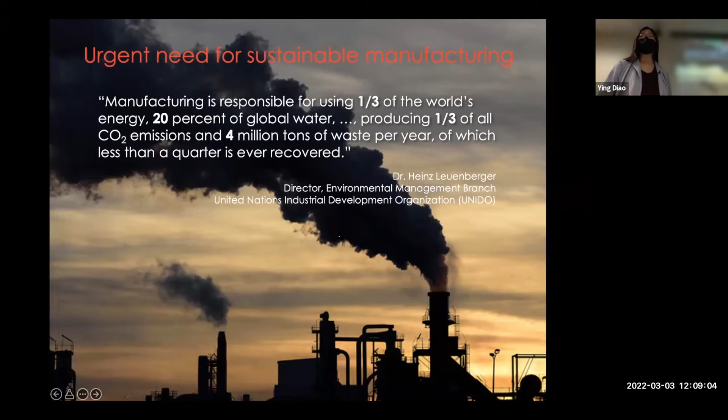So one day he was deep in thought, reading a book, and then he accidentally dipped his pen into molten tin on his desk. And then when he drew out his pen, he saw a single crystalline tin at the tip of the pen. At the time, he didn't anticipate this was critical to semiconductor manufacturing, but 50 years later, it was picked up to manufacture semiconductors. Basically, you use a seed rod to dip into molten silicon and then pull out a high purity single crystalline ingot.

Despite the ingenuity of the process, it actually requires a lot of energy. As you can see, you have to melt silicon. After you get these giant ingots, you slice it down in a subtractive process and then package it into a solar cell or tiny circuits.

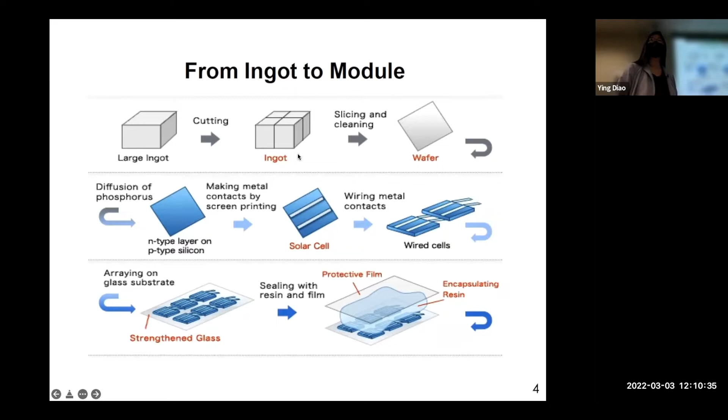These subtractive manufacturing processes are inherently energy intensive, because you have to cut things to break chemical bonds. Because of how energy intensive manufacturing is, we have to use the solar cells for 2 to 3 years to compensate for the manufacturing cost, the energy cost during manufacturing. So the energy payback time is 2 to 3 years for our silicon panels on the roof.

Also, for each ton of silicon, 4 tons of organic waste are produced. So it's hugely environmentally costly.

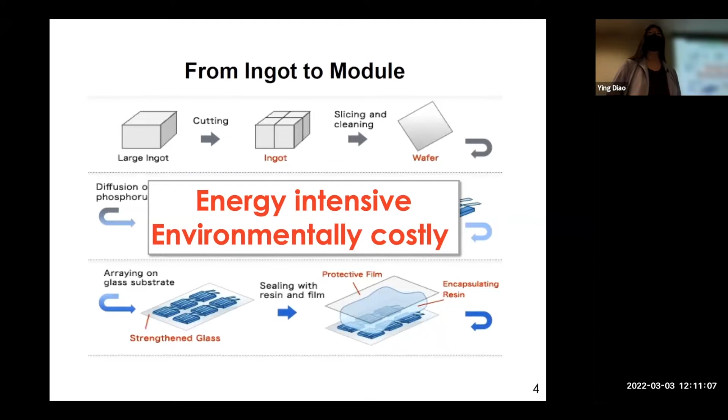However, if we can make solar cells the way we make newspapers, basically at ambient conditions using printing, then we can potentially drastically reduce the energy consumption. This is a video showing roll-to-roll printing of organic solar cells developed by a Danish startup, Infinity PV.

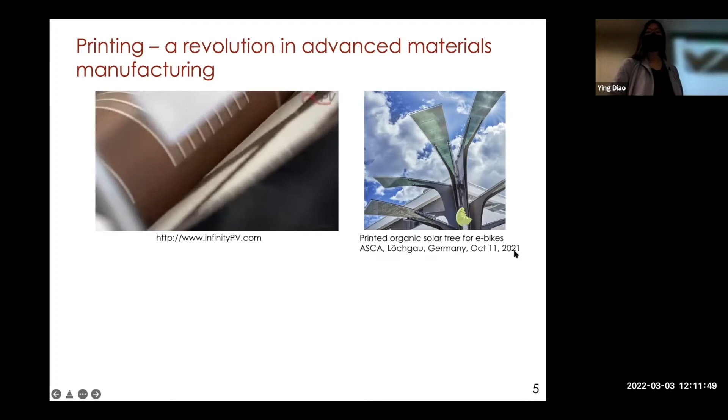In fact, there is a big push of organic PV commercialization in Europe. Here is a picture of a printed organic solar tree for electronic bikes in Germany that was recently installed.

In terms of energy consumption, if we print organic solar cells, the energy payback time can be as short as 1 day. That's a drastic reduction from 2 to 3 years for traditional silicon PV. And further, the manufacturing is high throughput.

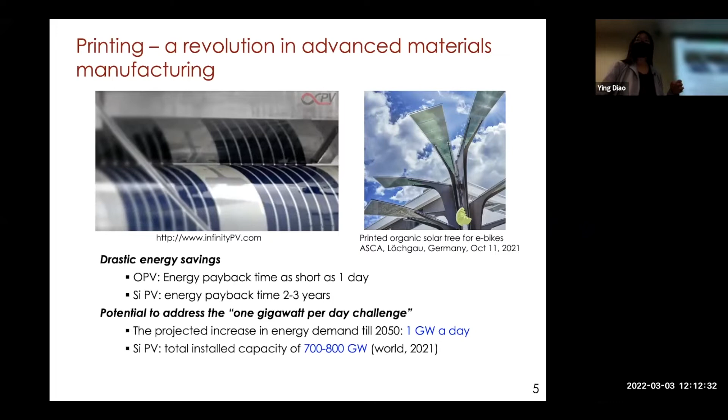Because of that, we can potentially address the 1 gigawatt per day challenge, since there's a growing energy demand by 1 gigawatt per day. That's a huge jump in energy demand every day. But if you look at silicon PV installed so far, it's only hundreds of gigawatts, because the production rate is just too slow for silicon PV to catch up to the energy demand increase.

But for organic solar cells, because we can print them the way we make newspapers, we can potentially address this rapid energy demand increase due to the throughput of production. That's just one example of how we can revolutionize advanced material manufacturing using printing. There are many other examples, such as printing batteries or thermoelectrics, etc.

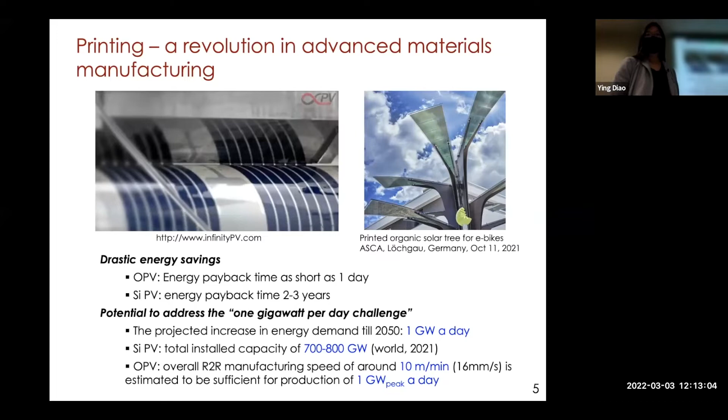Talking about printing technologies, we have come a really long way. As we learn in history books, printing was developed back in the Tang Dynasty using essentially a transfer printing method, by developing a mold and stamping it on the surface. Fast forward to the 21st century, a lot of innovations have happened to rejuvenate printing technologies.

The first one being digital revolution, embodied by 3D printing. One of the major advances of 3D printing is the seamless integration between software and hardware. This is the first patent that documented the integration between hardware and software for 3D printing.

That was almost as old as myself. So basically, CAD represents computer-aided design. You can conceptualize any objects you want to print, and then that is converted to G-code to direct the X, Y, Z motorized stage to print an actual object.

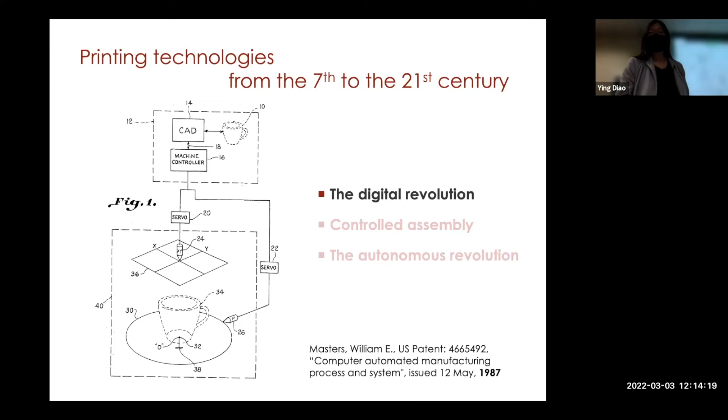Because of the digital revolution, 3D printers are now in the hands of everyday citizens. Another opportunity or challenge is to control assembly during printing.

When we print newspapers, we really don't care about how the ink particles assemble. But when we print functional materials, for example electronics or photonics, it's essential to be able to exactly place atoms where they need to be, or molecules with the right conformation and positioning.

This has been identified as one of the major challenges of transforming manufacturing by the Department of Energy only 2 years ago. So it still remains a challenge, but also an opportunity for us to innovate in this space.

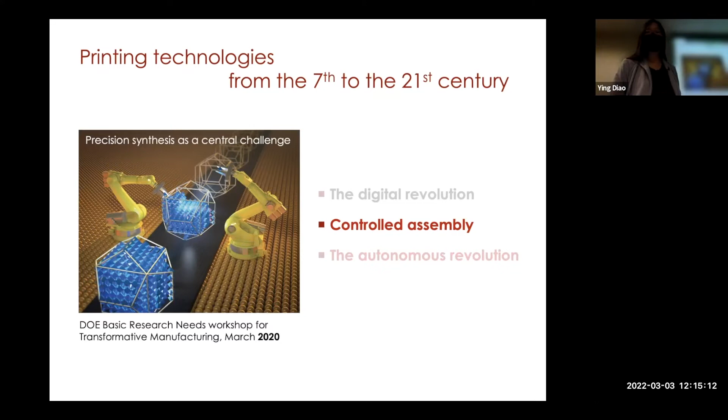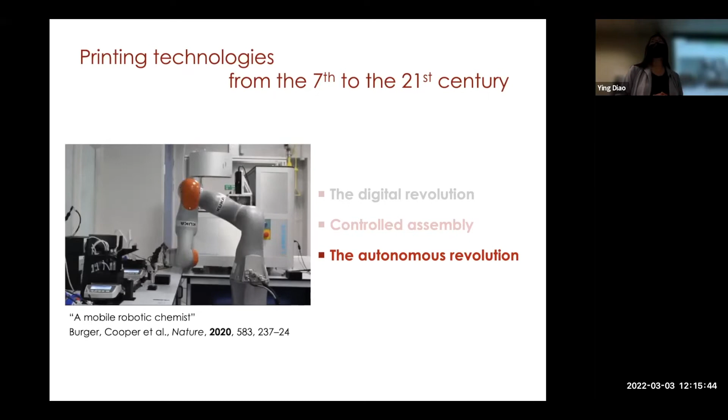So while using robots in manufacturing is nothing new, it's been there for several decades, the important distinction here is that these robots can think and make decisions by themselves. Based on the data they collected, they can think about what's the next step to take, enabled by artificial intelligence and machine learning.

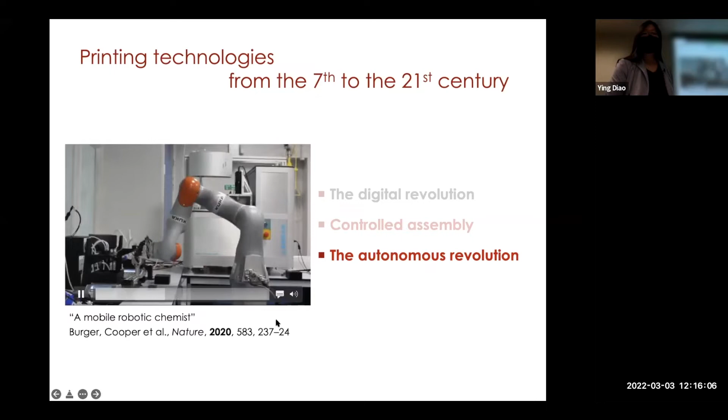So, this example is not relevant to printing, but actually the autonomous revolution is coming to the additive manufacturing domain just in the last few years.

So we'll adopt a two-pronged approach. One is that we hypothesize that assembly is essential to control structure and properties. So we'll use a physics-based approach, gaining fundamental insight of the assembly process so that we can enhance the properties of the materials we print.

An alternative approach is to say, well, let's not spend too much time figuring out how things work, but rather let's just go into a lab and do many, many experiments over and over again. With the data collected, we see if there is a trend between parameters and properties, and then decide what to do next. So that's basically an Edisonian trial and error approach, but accelerated by automation and machine learning. We think the two approaches are complementary, and they can mutually enhance each other.

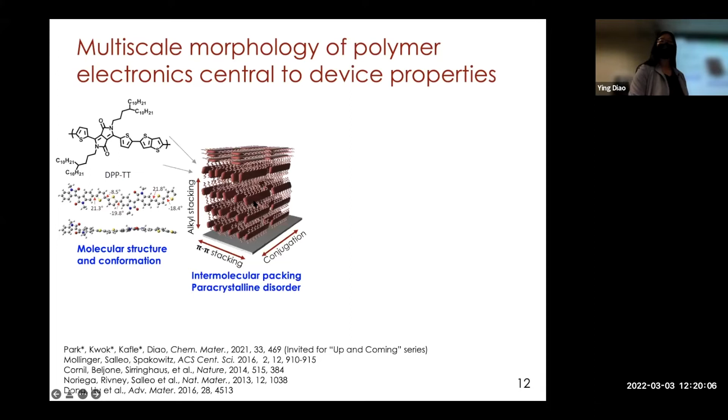These polymers can stack together, driven by strong pi-pi interactions, and that enables another transport mode from chain to chain, in addition to zipping a charge along the polymer chain. Surrounding these crystalline domains are amorphous domains, so we have to shuttle carriers between crystalline domains using tie chains. The community has figured out that alignment of the chains is very important to expedite charge transport.

So you can see that, well, this is an example of a simple transistor device that underpins a lot of electronics. You can see that there is a complex multiscale morphology we have to control during printing, and that can drastically tune electronic properties by orders of magnitude, even with small changes, such as twist.

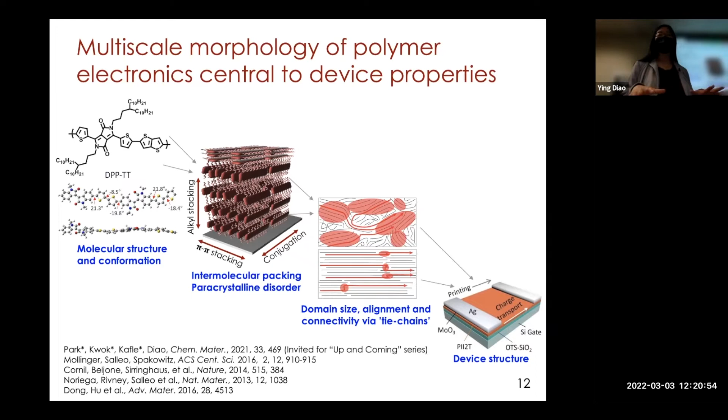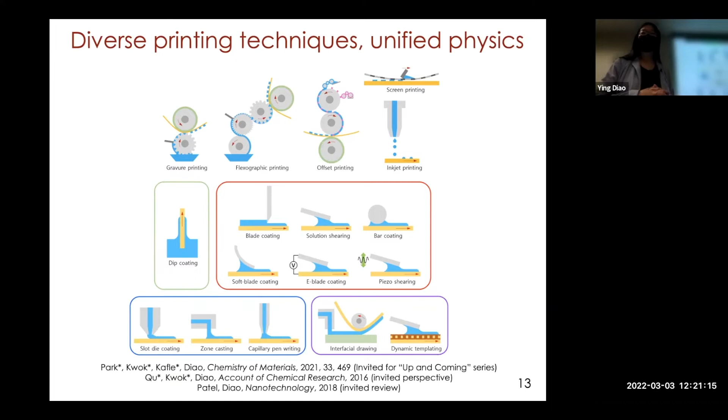One of the advantages of polymer electronics compared to silicon is that they are printable, and there is a wide range of printing technologies applied to printing electronics. They vary depending on how we apply the ink to a substrate. Although the list looks dazzling, there are just too many.

But if you lift the curtain to look at the physics, there are only two types of physics at play. One is a drying droplet problem that resembles how you spill coffee on the table and see how the coffee droplet dries. This underpins, for example, inkjet printing.

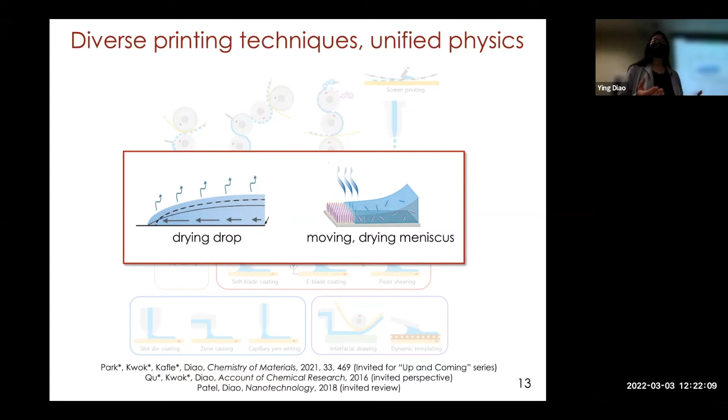Another type of problem is the moving drying meniscus. Basically, if the substrate or the ink applicator is being moved, then we drag out the meniscus that'll define the evaporation and assembly process. This underpins most meniscus printing techniques - to put it simply, it resembles how we apply butter on bread using a blade.

To get a little technical, it's fascinating to look at the transport processes during solution printing. For the drying droplet problem, the physics was figured out through the coffee ring phenomenon back in 1997. If you're familiar with coffee ring, basically if you drop coffee on the table, you'll see a ring that forms after the droplet dries.

That's because there's an uneven evaporation profile modulated by curvature of the ink-air interface. The evaporation rate radically increases when you get to the triple phase contact line. Because of this evaporation profile, it pulls the ink from the center to the edge through a flow called capillary flow, and that drives the particles to deposit on the edge. During inkjet printing, the physics is essentially the same.

Another type of transport process is governed by Marangoni flow. Due to the evaporation profile being uneven, there is a temperature/concentration gradient at the ink-air interface, which can drive an interfacial tension-driven flow. That's Marangoni flow.

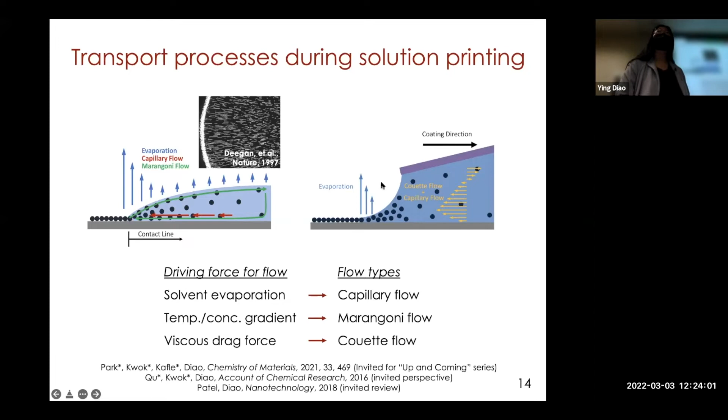If we start moving the substrate or the ink applicator, we introduce another flow type, driven by the substrate moving - basically the ink wants to stay with the substrate. That's called viscous drag force, and the flow resembles flow between parallel plates, which we call Couette flow. So you can see that the transport processes are really complex in these seemingly simple printing processes.

These processes define a very complex environment for the polymer molecules to assemble. Our question is: how do we know how the polymers assemble in this complex environment? If we know it, we can potentially control the assembly process using printing down to the molecular scale. So we hypothesized that during printing, the assembly pathway is drastically different from what is known.

This is a pathway figured out a few years ago. If you were to put a polymer in a vial and cool it down to assemble, we know that the polymers will first planarize at lower temperature, and then they will aggregate, and different parts of the polymer may crystallize separately - for example, the backbone and side chain can crystallize in separate steps. That'll form nanofibers, and the nanofibers can assemble in a colloidal fashion.

But then we're saying this pathway can be radically modified when we look at printing.

In the spirit of the Beckman Institute, I'd like to highlight that this is a team effort - team science - where we worked with David Beljonne from University of Mons in Belgium, who did DFT calculations to help us look at the electronic structure of polymers. Diwakar Shukla's group did molecular dynamics to help us understand the structure of the polymers in solution. Qian Chen's group in material science here did electron microscopy to review nanoscale structures of these polymers. The work was mainly done by Dr. Kyung-Sin Park and Justin Kwok of my group.

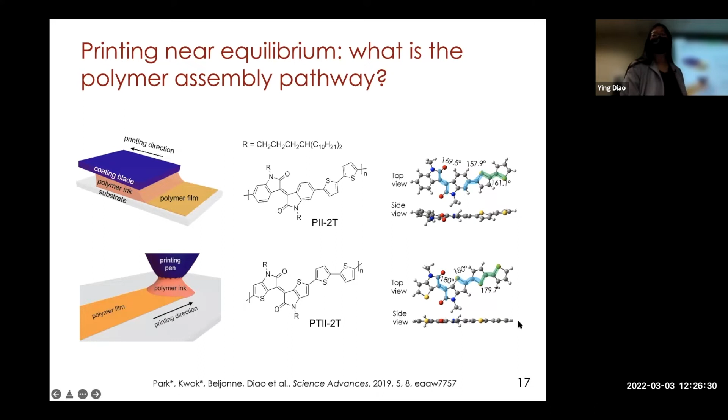One is a copolymer that is slightly twisted, if you look at the DFT calculations side view. The other is more planar - when we replace the benzene ring with a thiophene ring, we reduce the steric hindrance between oxygen and sulfur, and therefore planarize the polymer. The difference is very subtle, but nonetheless we found two radically different pathways between the two polymers.

So for the twisted polymer, we saw that if we print slowly, before the ink dries into a polymer thin film, we observe a blue phase, which is a chiral crystal mesophase. That is very surprising to us because the polymer itself is achiral.

Whereas when we print the planar polymer, we bypass the mesophase altogether. We observe this phenomenon again using another pair of polymers based on diketopyrrolopyrrole. Again, the twisted polymer goes through a chiral crystal phase, whereas the planar polymer bypasses the crystal phases. You can see that the texture of the films are really different, as well as the properties in the end.

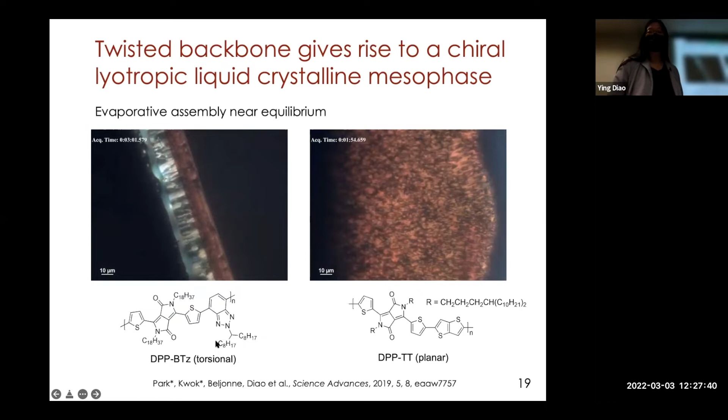So what's intriguing is how achiral polymers can give rise to chiral structures. So we determined that actually what underpins chirality is the helical structure.

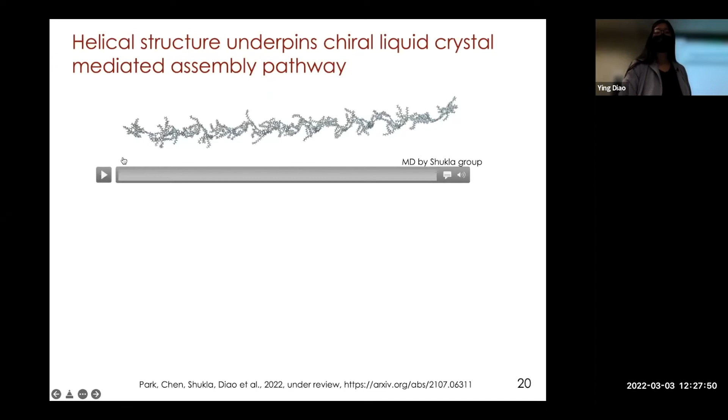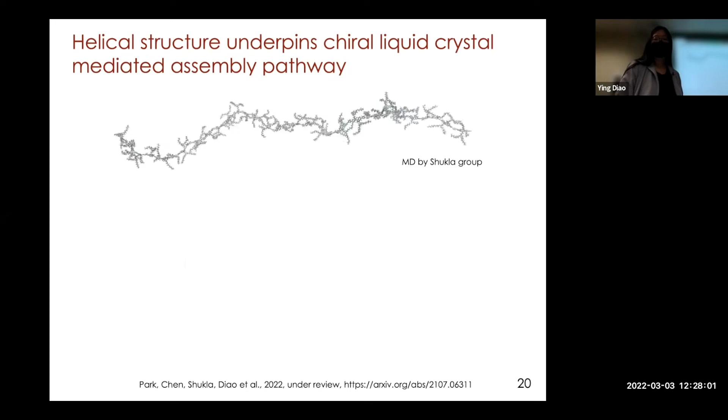We show that because the backbone of the polymer is slightly twisted, it can assemble in the solution phase as a helix, as shown by MD calculations. We show that basically how the helix forms is because the dihedral angles are correlated. If you look at the dihedral between the two thiophene rings, if it twists in one way, the next thiophene dihedral will also twist the same way. So they want to twist in the same way, and that's why they can form a helix over long range.

Another essential aspect is that these wavy polymers can stack in a staggered fashion to aggregate into helical fibers. That's shown by DFT calculations, that the pi-pi stacking happens in a staggered fashion. The indigo ring and the thiophene ring stack at 45-degree angles, which is a global minima. That's very different from how we traditionally think about stacking between these polymers. Usually we think they're cofacial, but actually they're staggered, and that enables such helical assembly to happen.

Having imagined this structure and validated it by electron microscopy, it really changed how we think about the structure of these polymers, because usually people think of them as layered structures driven by pi-pi stacking, but they can assemble into a helix. As we'll show, this can radically change the electronic properties.

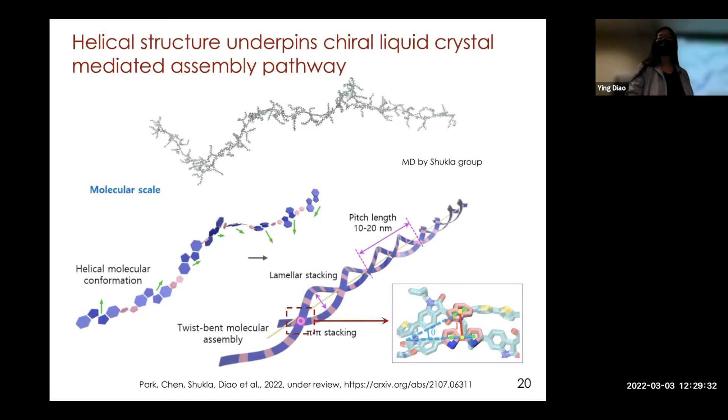Next, we really want to understand when we print far from equilibrium, what happens to the assembly pathway. Can we tune the assembly pathways using printing processes? So we carried out finite element simulations, done by grad student Justin Kwok.

Just now I was showing you the evaporation regime where we evaporate slowly. Recall the coffee ring phenomenon where the deposition occurs at the triple phase contact line. If we print faster and faster, we enter a different regime where we drag out a liquid tail that cannot be fully evaporated, so the liquid returns to the bulk of the ink.

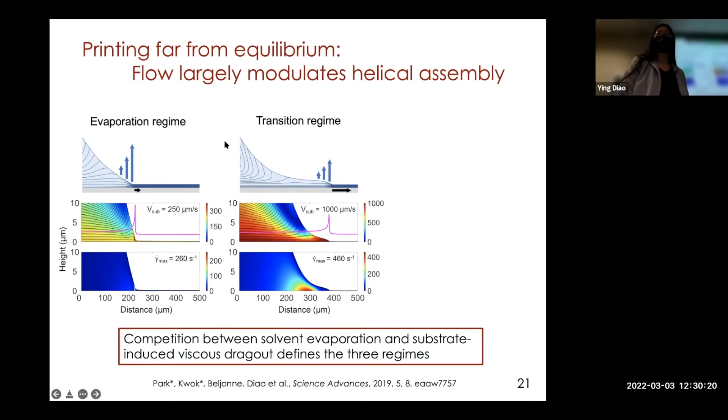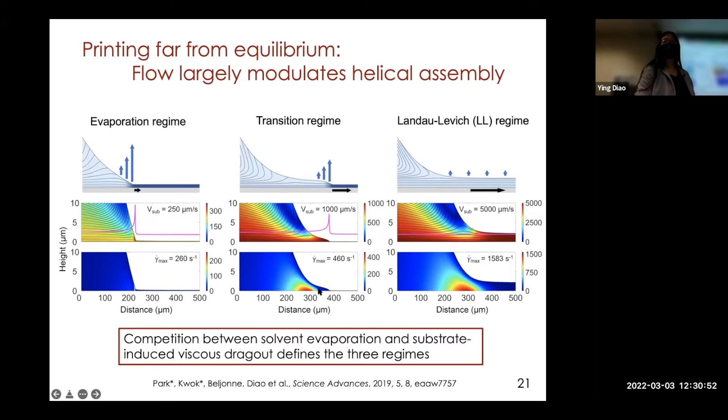This returning flow creates a high strain rate pocket shown in this view. That's the strain rate plot where red indicates high strain rate regions, whereas blue indicates low strain rate regions. If we print even faster, you can see that this red pocket grows bigger and bigger. We essentially show, as I'll demonstrate, that these red pockets have profound implications on assembly pathways.

In the evaporative regime where the red pocket is absent, we assemble through a chiral crystal phase, resulting in a ramen noodle morphology. Whereas when we enter a transition regime where the red pocket is present, we stretch out the polymer driven by the high strain rate of the printing flow, and then deposit a film that resembles linear spaghetti. This shows that printing offers the opportunity to tune polymer structures down to the molecular level, and that propagates all the way to the micron scale.

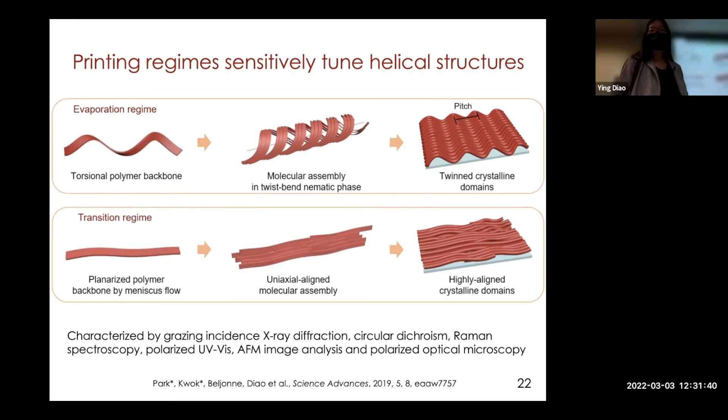So, well, how does that matter? Because even small changes in the polymer conformation can radically change optoelectronic properties. We made these devices to assess how charge transport, the speed of a charge carrier, is different in these different polymer structures. We made these transistor devices.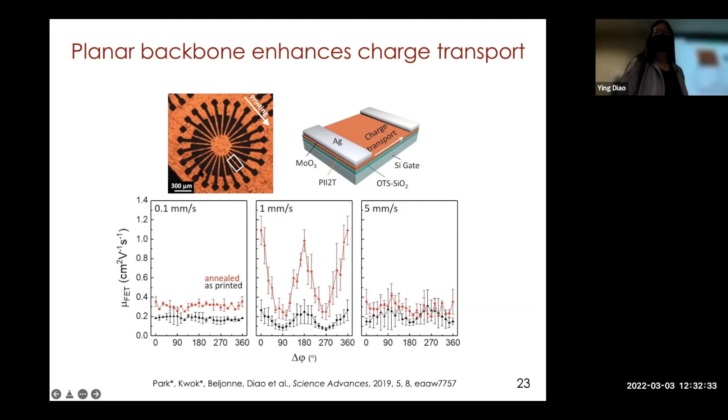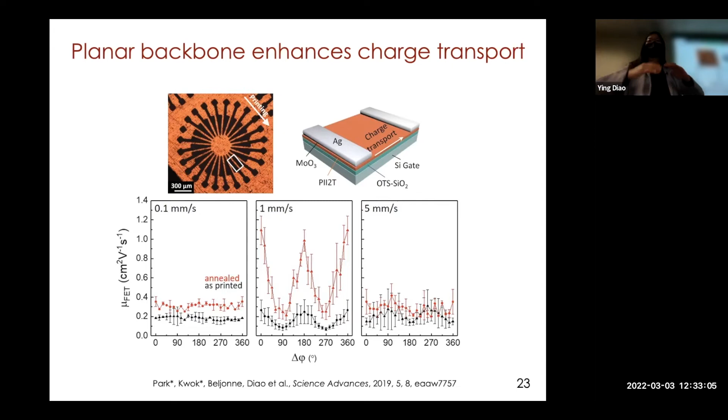And the charge carrier mobility, which is the speed of the charge carrier, remains low. Whereas when we stretch out the polymer, we then preferentially transport along the polymer backbone—that's these high points along the polymer backbone direction. Also, the charge carrier mobility is significantly enhanced by 3 to 4 times. So this tells us that the planar backbone, although we only planarize by 10 to 20 degrees of torsion, can drastically enhance the speed of the charge carrier.

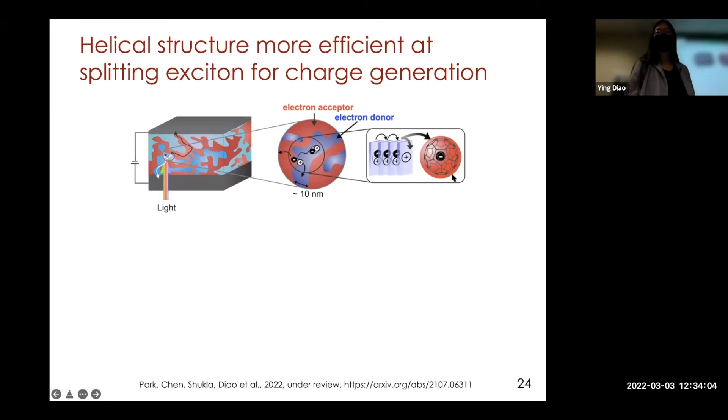But for the planar structure, the photoluminescence hardly changed when we blend the electron acceptor into the electron donor. This means that even if we introduce a lot of interfaces, the excitons do not split—most of them are still emitting photons by recombination. So this tells us that helical structures can radically increase charge generation. This offers hope that we can tune the polymer structures to potentially enhance solar cell performance, which we're trying to work on now.

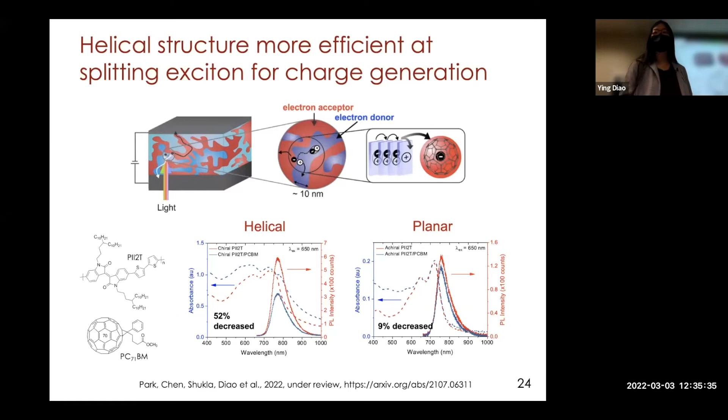But I think the key message is that by understanding the assembly pathways, we can use printing to control the helical structures on demand. Based on different applications, we can tune it to cater to them. Next, I would like to show you that the concept we developed—controlling assembly through printing—can be applied to another class of polymer that exhibits structured color.

Structured color is really fascinating. Who doesn't love chameleons, right? Actually, only recently did we figure out how it works—why does it change color the way it does? There are guanine nanoparticles embedded in its skin, and upon excitation, the spacing between the guanine nanoparticles changes. That spacing is on the order of the wavelength of light, and therefore the color can change upon excitation. This approach is really smart because it enables structured color to be dynamic.

However, if you look at how we make colors, it's mainly based on synthetic dyes. Not only is that static, but it's also a major environmental pollutant. Globally, every year we make 1 million tons of organic dyes, and 2 to 10% of them end up in water. That's one of the biggest threats to the environment, as stated in this book. Our goal is: what if we can design structured colors the way chameleons do, and replace some of these dyes to help mitigate environmental pollution?

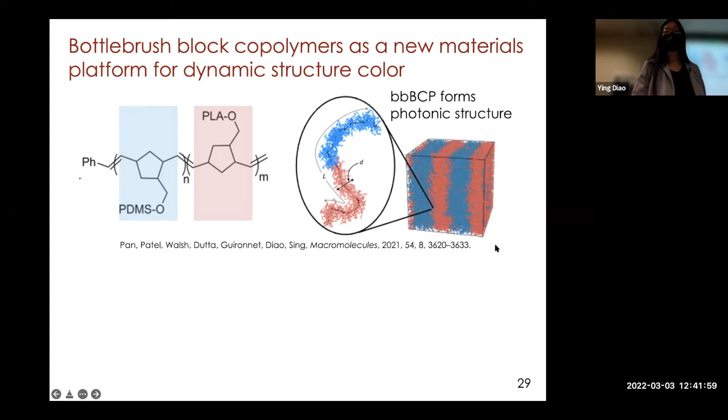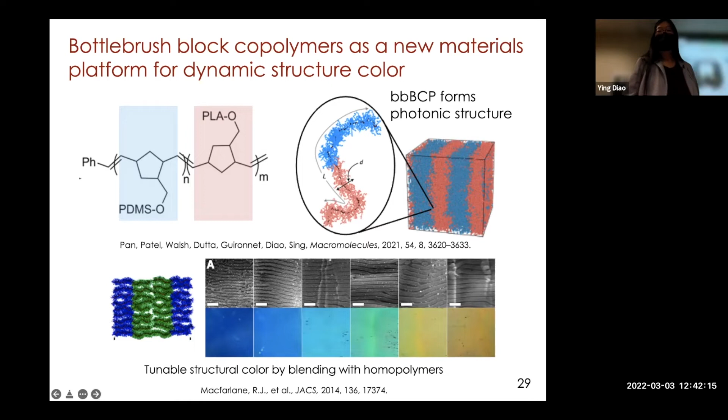In the literature, people have tuned the assembly, the photonic properties of these materials by changing the polymer themselves or the composition. But here we're saying that we want to achieve tuning of structure color by printing. We bought commercial 3D printers, designed our own printhead, and made our own software. When we print the polymer, we hypothesize that we can tune the assembly process of the polymer conformation so that we can tune the photonic properties on the fly.

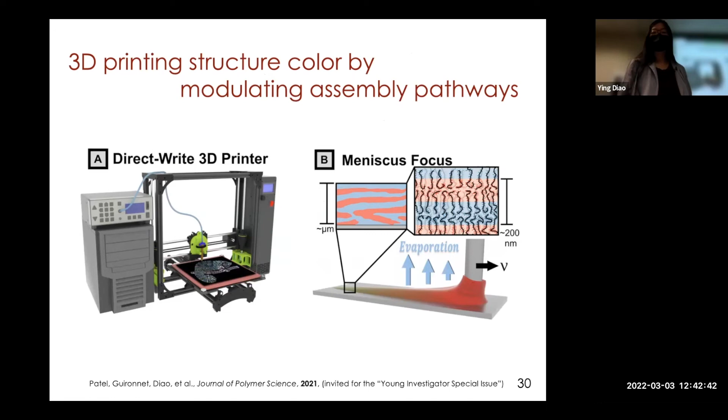And indeed, we showed that we can simply tune very simple printing parameters, just the printing speed and the substrate temperature, to access a really wide palette from red all the way to blue. You can see that the spacing actually varies very largely, over 70 nanometers. That's a very wide space that we can tune simply by printing.

Okay, I think I'm loud enough, I think. All right, so...

We want to understand how this process works so that we can better design the printing processes to control structure color. Essentially, we figured out that the assembly pathway is driven by concentration. Basically, when we increase concentration of the polymers as the solvent evaporates, we drive the polymer to assemble into these microphase separated structures.

What's important is that in the later stage of assembly, the polymer becomes straighter and straighter, so the spacing at the nanoscale becomes larger and larger. Basically, we're evolving from blue to red during the assembly process.

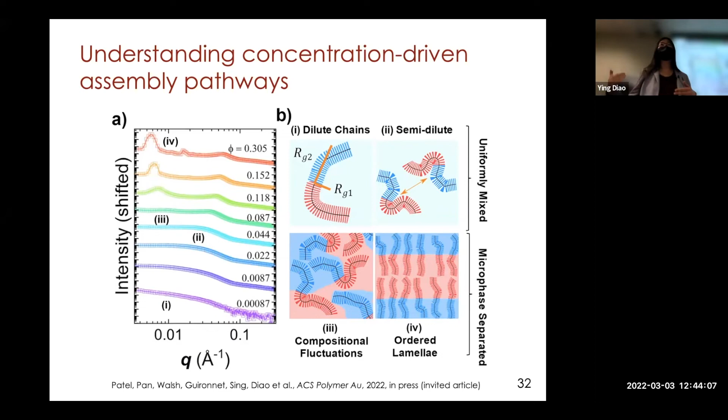Then the question is how the printing controls the spacing. It actually does so by setting the assembly time, which we figured out. We determined the printing time scale varies as a function of printing speed. Basically, the faster we print, the faster the drying time, and the bluer we get.

We also separately mapped out the assembly time, and most importantly, we figured out that the drying time actually sets the assembly time. Basically, if we dry faster and faster, we arrest the assembly before it reaches equilibrium, and therefore arrest the bluer state. So here's the mechanism that we determined.

As the polymer assembles, it evolves from blue to red because the spacing is progressively increasing as we pack the polymers closer and closer, and the polymer becomes more rigid. But if we remove all the solvent before we reach the equilibrium state, we arrest the structure at a bluer metastable state. If we heat up the substrate, we push the assembly faster so that we arrive at a redder state earlier.

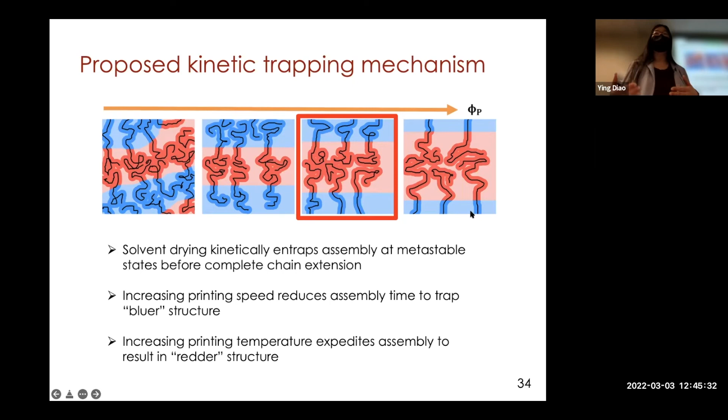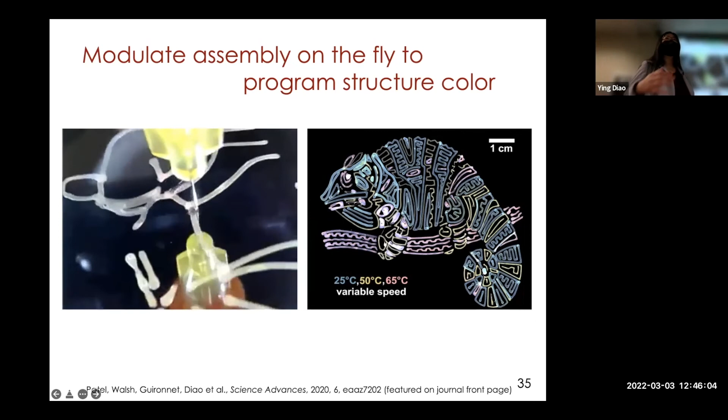With this insight, we simply programmed the printing process and made these colorful prints without changing the ink materials. Imagine you have one single pigment, and then you shuffle it into the printer, and it can create a colorful image without you having to change the structure of the ink or the composition. That's the power of understanding how printing tunes assembly, giving us dynamic on-the-fly control.

And in fact, this chameleon showed up in 2 French children's magazines that flew all over the globe while we published the paper.

Well, that's the physics-based approach. So moving forward, we really want to push this project forward by being able to print real 3D structures, going from 2D to 3D, and also to bring the plane structures to life, to make it really dynamic like chameleons. You can imagine how complex this process will be, because now there are so many parameters we have to tune.

So we then leverage a data science driven approach again to develop this closed loop autonomous discovery and additive manufacturing for dynamic structure color. That'll be in collaboration with Dr. Benji Maruyama of Air Force Research Lab.

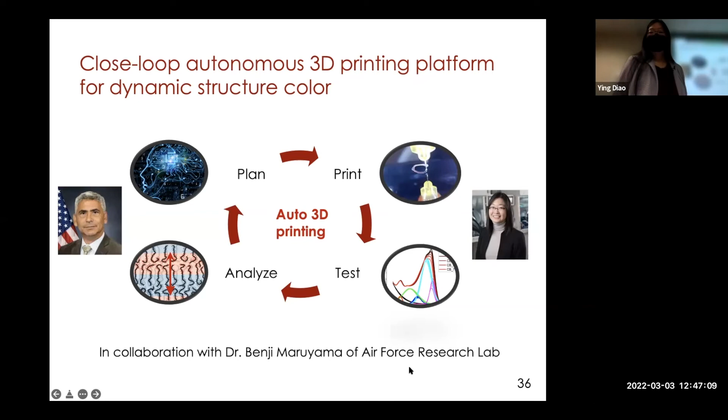Okay, so for the next few minutes, buckle up, and we'll take a brief trip to Mars. What if some of us have to become Martians one day? Well, hopefully we don't have to, if we can solve the sustainability problem on Earth.

But just in case, NASA has envisioned these enclosed chambers, vegetable growth units that can be landed on Mars to produce food. As you may have seen in the movie The Martian, it's incredibly important to grow food on Mars. If we go inside, this is an envisioned view of a vegetable growth unit on Mars.

The environment for plants is very, very different. The lighting will be provided by LEDs, red, blue, green LED light. And because of the lack of proper soil, you have to resort to hydroponics to cultivate these plants. These units are actually very similar to the urban agriculture containers we're thinking about for Beckman.

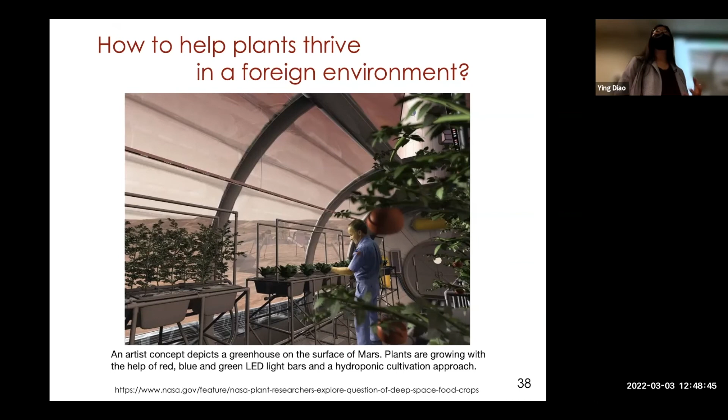But then the question is, the plant needs to thrive in a very different, foreign environment. How do we help the plants grow better in those environments?

Our approach is to think about how to help the plants grow happier in a foreign environment. What if we put wearable electronics on them, so we can translate the plant growth signals or chemical signals into a happiness scale, and then tell the chambers what to do next to optimize the environment for the plants? That's the idea.

Printing electronics is really ideal for space missions because the fabricated sensors are lightweight, can be made on demand, and are very versatile. Also, the materials themselves are high performance.